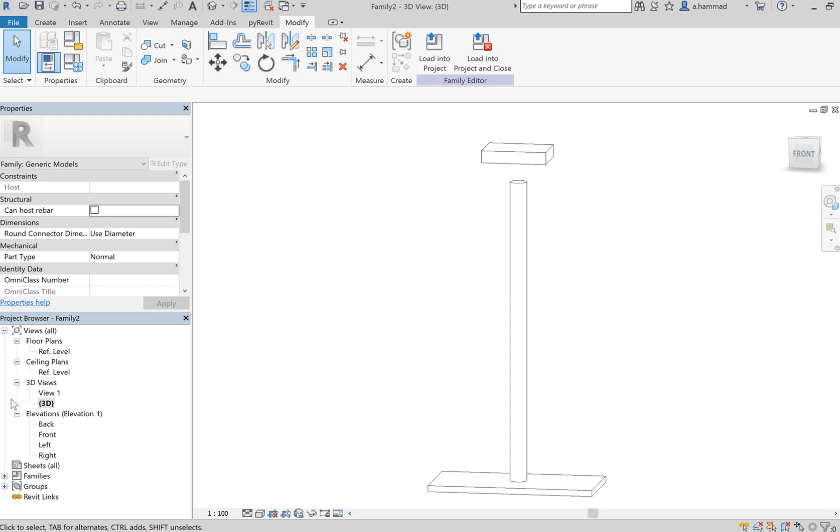And to do that, go to your back elevation. The first step is we need to ensure that this thickness doesn't change. So once you're happy with a particular thickness, you can dimension it. So you click on that, let's dimension that, and let's lock it.

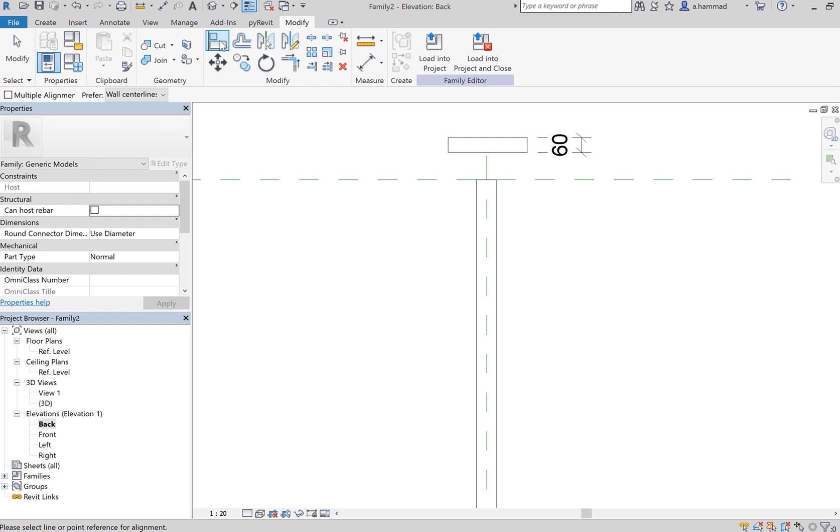And the second step is to align. So you use that align tool and you click on the base. The base is going to be a reference because we want to align the bottom of this plate to this reference. So this is going to be our base, and let's click on that, the bottom of the plate, and make sure you lock it.

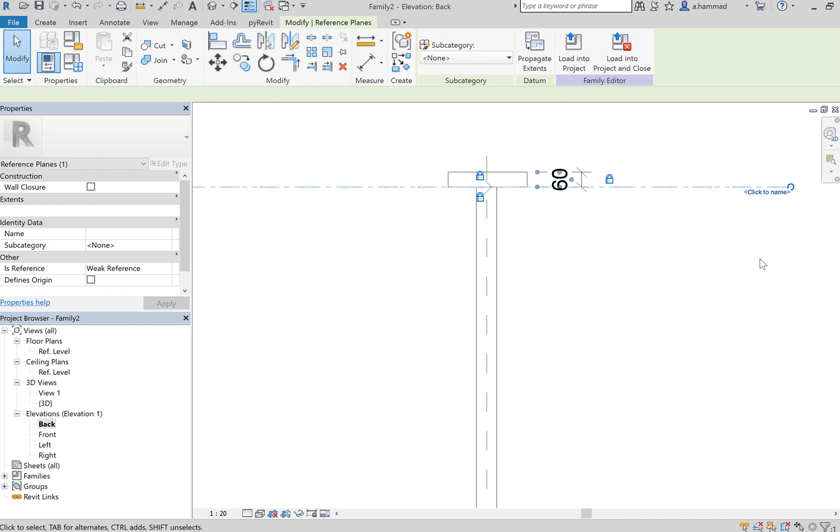So notice now what happens if I change the height of this reference plane by using the arrow keys. My stem and my plate are going to shift, and that's due to these two locked edges. Okay, so the next step is to create the spacing between, so that spacing that's going to sort of clasp your beam.

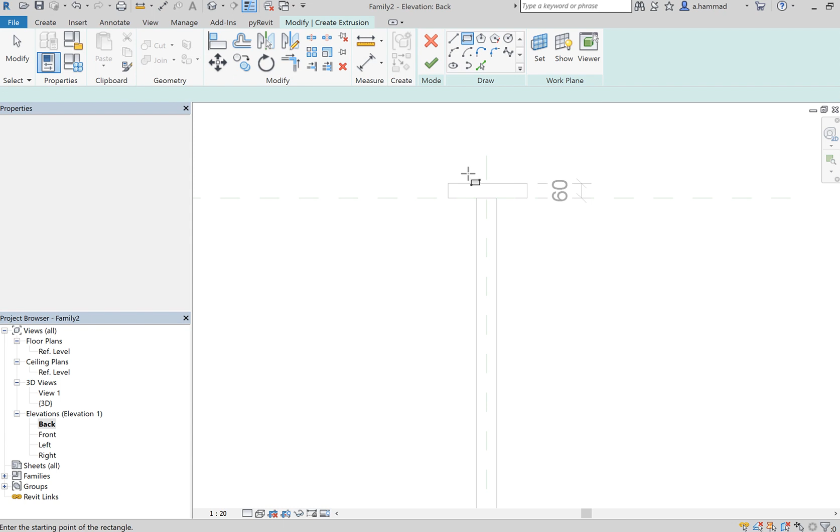And to do that, again, go to create, extrusion, select that rectangular one, and let's create one over here, and let's link its base to the top of the plate. So make sure you lock that to do this, and then click on OK.

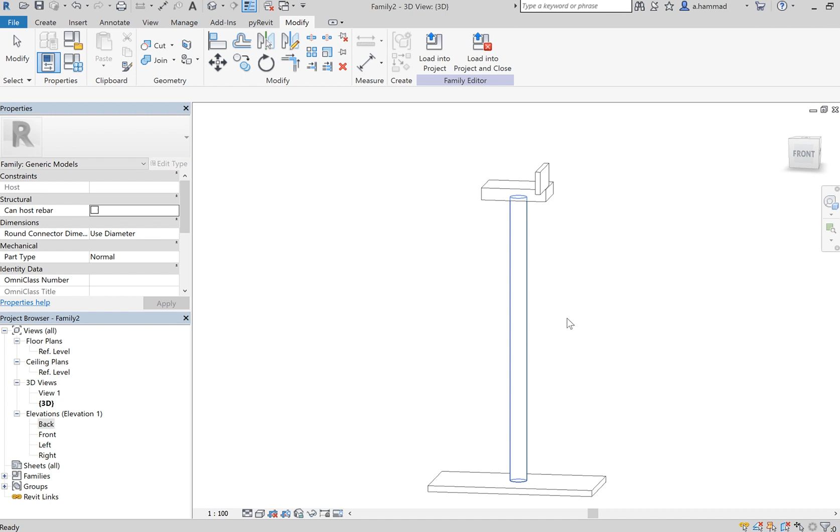Now I can shift that so that it's closer to the end of the plate. And if I have a look at it in 3D, you'll notice that it's not really in the middle.

I can shift that, of course, because of the way I created the extrusion using my arrow keys. So I can just play with these arrows, and I can lock to this end of the plate, and I can do the same with the other side.

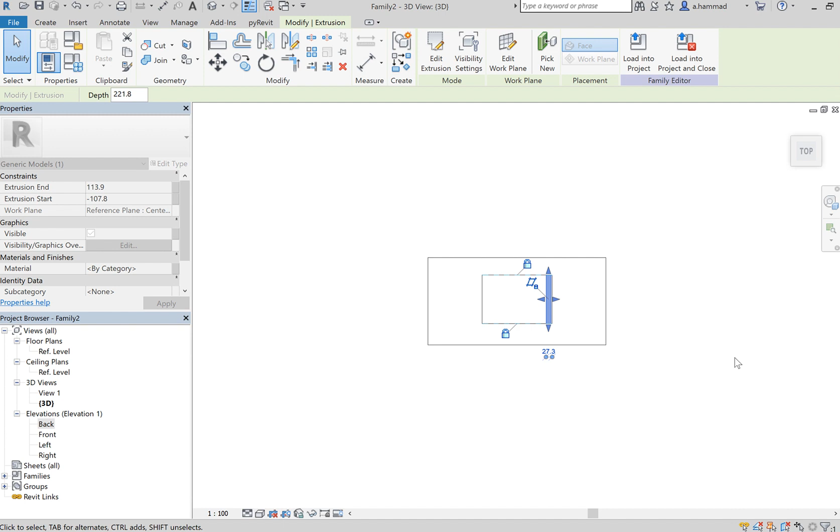Again, lock that. So if I have a look at it now, yeah, it looks alright. So I'll go back to my back elevation.

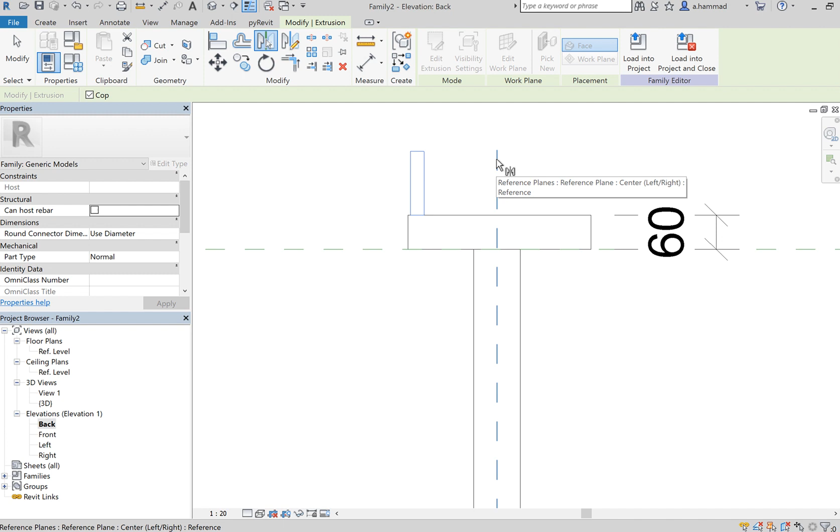Click on that. If I want to create another one on the other side, the easiest way is to mirror that. So using that tool and then using this axis, as you see, it mirrors that to the other side.

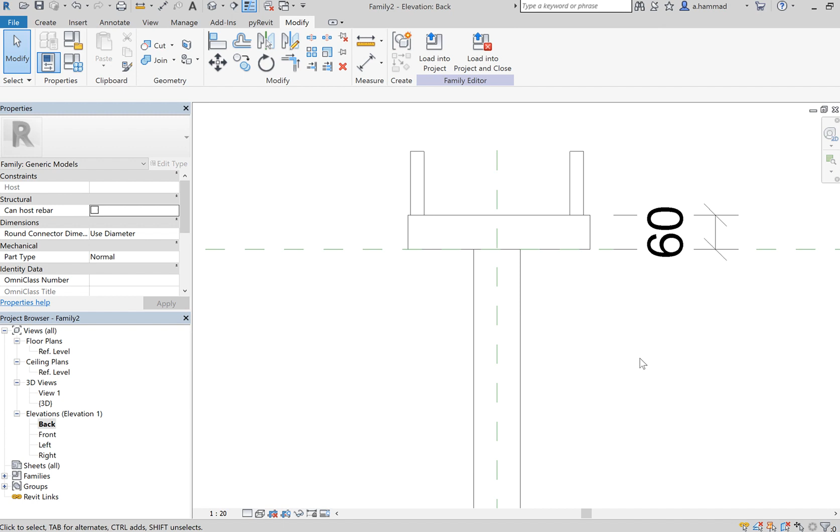And this tells us that this is a bit too thick, so maybe you can play a bit with the extrusion. Just like that. And then if you have a look at it,

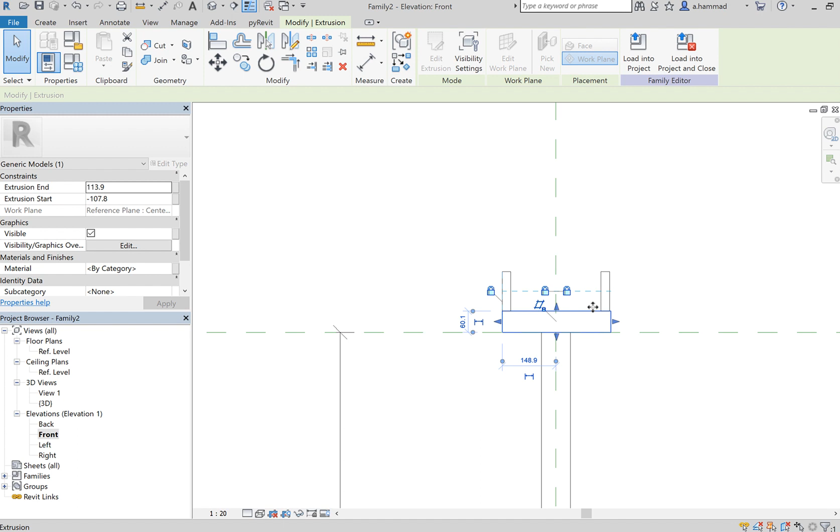okay, so we're almost done. What we need to do is we need to lock that so that it's at the very end, and then do the same with this side.

Just lock that. What we need to do now is we need to add shape parameters for this dimension, and we also need to dimension this space in between. So I'll show you how to do that in the next one.